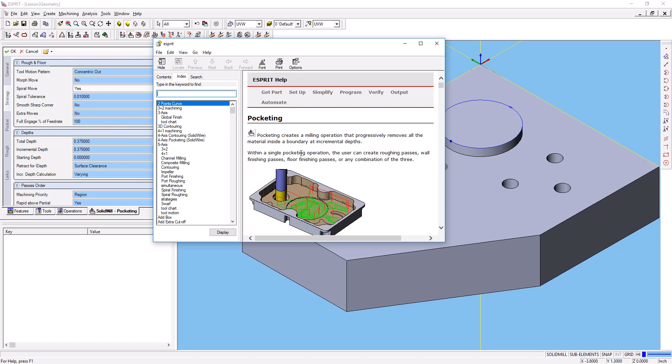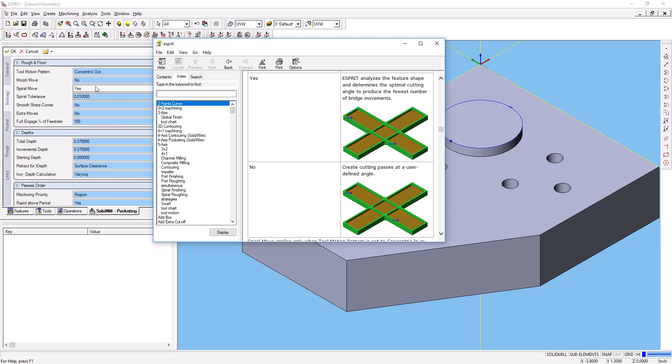At any time in any of these operations, if you want to, you should go to the context sensitive help. Go ahead and open that up. It will bring you right to the page for the type of operation that you're on if you're in one of the operations. Let's see, we're in the strategy tab now, so we can go to our strategy tab. We can come down here and we can read about what all these different things in the strategy tab do and how changing them will affect your part. So take a moment there to go through and read those if you'd like to. For now, I'm going to close the help. We're going to ignore these.

Now, our total depth, because we defined the depth when we created that pocket chain, it read that right off of there. If we had just defined the top edge of the chain, we could go in and type in our total depth. It's got the incremental depth set to 0.375, and it did that because it's guessing that our tool will allow us to go a full diameter in depth there. Now, you can overwrite that and change it to whatever value you want. The starting depth is 0.

Now, that starting depth is measured from the XYZ 0 that's defined as the work coordinate. So you can see that's up in this corner of the workpiece here. So you see this is our UVW axis here, or XYZ axis, where Z is the up direction, Y is this green direction, X is the red direction there. And you can see that it's coincident with the plane that defines this top surface here. And so our starting depth will be 0 because we want to start cutting the pocket at the 0 point there. We don't really care about this surface clearance and retraction thing.

Now we can scroll down here. There's some other options about priorities. Do we want to use stock automation? We're going to select no. When you do select yes, and later in the class we will be selecting yes for stock automation for some operations, it will take longer to calculate that toolpath. So for now we'll say no. In the pocket tab here, our pocket doesn't have any islands in it, so we don't need to identify any islands. There is no taper, but it's fine if it reads it from the part.

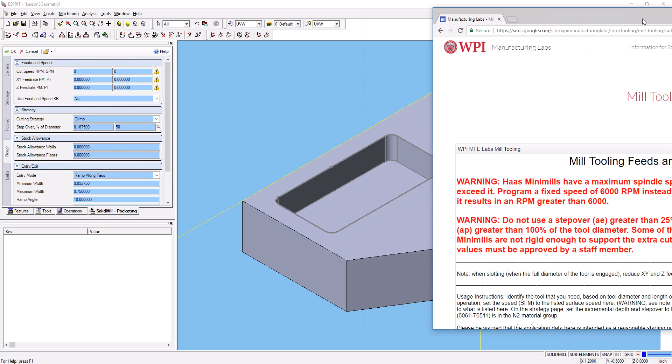In the rough tab, this is telling us the toolpath motion that it would do for the roughing operation, and again, we're not going to do any finishing operations, so this is the whole shebang, as they say. Our cut speed, now you can look this up in your spreadsheet that you created in the previous lesson, or you can go back to the source material that you used for the spreadsheet. I don't have my spreadsheet handy right now, so I'm going to go back to the mill tooling page on the MFE Labs website.

And I remember here that our Haas mini mills have a maximum spindle speed of 6,000 RPMs. And so regardless of how fast the tool wants to go for surface speed, the maximum that we could do is 6,000. So I'm going to go ahead and put in my 6,000 there. And it's going to automatically calculate in the next box over what the surface feet per minute is, or the SPM, Esprit calls it. But that's our surface speed, and that's in feet per minute. So 6,000 is about 590 feet per minute with our 3/8 inch end mill.

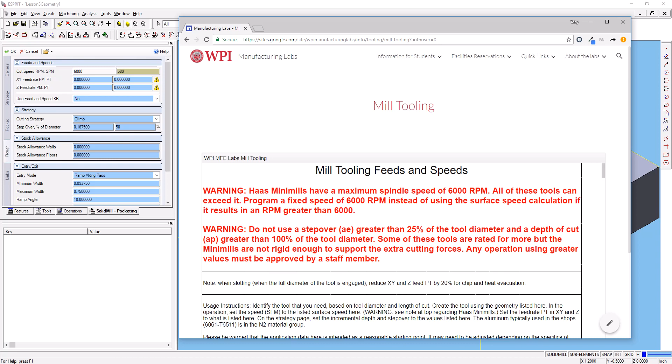Now, it can't do that calculation if we haven't already told it what the tool diameter is. Back to our rough tab. Okay. And so our XY feed rate, let's assume that we're using one of these 3/8 end mills that we've got here. Our material group is non-ferrous. It's N1 for aluminum. And so at the 3/8 inch end mill, it wants to do an XY feed rate of 0.0034 inches. That's the per minute box. I'll go to the per tooth box, 0.0034. It automatically calculates the per minute feed rate based on the spindle speed that we put in.

And for our Z-axis feed rate, remember that we never want to plunge directly with one of these non-center cutting end mills into the part. We do still have to tell it how fast to feed when you're moving in the Z direction. Our rule of thumb here is we use 1/10 of the feed rate that was there, which is pretty easy for me. I can do 0.00034. Put that in there, and it calculates it. Now, I hit return, and it automatically exited out of it, and it created a toolpath. I can now double-click on that toolpath and open it back up for editing again, because I hit return and I wasn't quite ready to. So let's finish going through here.

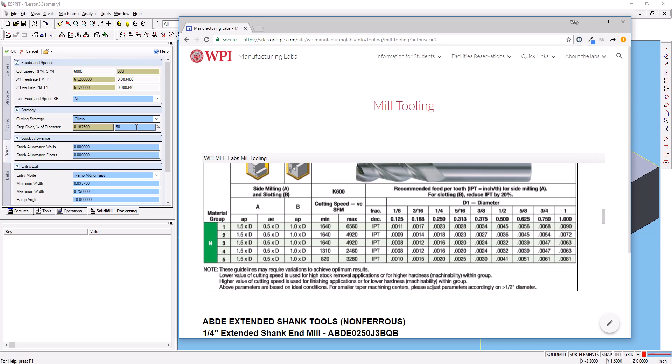So we're going to use a climb cutting strategy. It automatically selected a 50% step over, but for our tool, the tool manufacturer says for step over we can do a half diameter in our AE value. AE value is this one here. So it says 0.5 times diameter. With our mini mills, we're sort of power limited, and we're going to cut that back. If you do 0.25, it thinks you want 0.25%. We'll do 25% step over for this tool. We don't want to leave any stock allowance on the walls, no stock allowance on the floor.

In our entry mode here, there's a few different things you can select. Now, we never want to plunge into the part with this end mill. It's our last resort to plunge in. We can do ramp along pass, plunge at point. Again, we don't want to plunge whether it's at a point or not. We can do a helical at a point. We can do ramp contained, which means it just ramps inside the part, but not necessarily along one of the passes, and a helical contained. And so for this exercise, let's go ahead and select helical contained.

We have a minimum radius, so that's the smallest radius we'll let the tool do. We'll set our helical angle, and so 10 degrees works for a lot of tools, but with these smaller diameter tools, let's go with a 5-degree helix angle. This edge clearance means how far away from the edge of the feature you want it to stay while it does this. We'll use 50 thousandths there. The other option here is if entry fails, plunge, but we don't want it to ever plunge in the part. So we're going to select if entry fails, skip. Exit mode is ramp, that's fine. So this is how it's going to enter the part when it begins cutting. This is how it's going to leave the part when it finishes cutting.

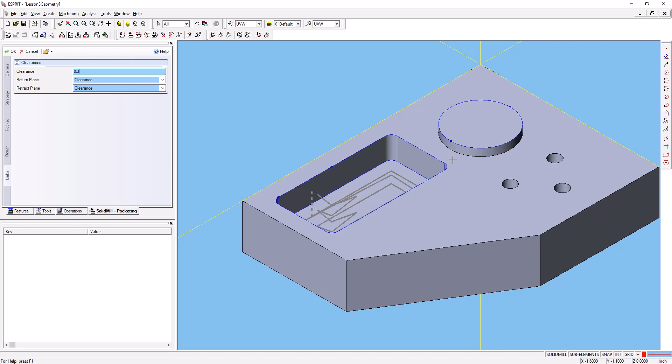On the links tab, this tells you how high up it moves and where it moves to when it's going between two cutting operations with the same tool. Our clearance here is 0.1. We're going to return to this clearance plane and retract to the clearance plane if it has to move up in the middle of the operation, which it doesn't have to do here. Now, this 0.1 could come to bite us because this boss is 0.125 inches tall. So we can change this 0.1 to 0.3. Then whenever it retracts and moves sideways, it won't run into that boss feature. So I'm going to click OK. If you clicked OK before you needed to, you can always double click on the operation. Next, we want to simulate this operation and see if it looks like what we expected.